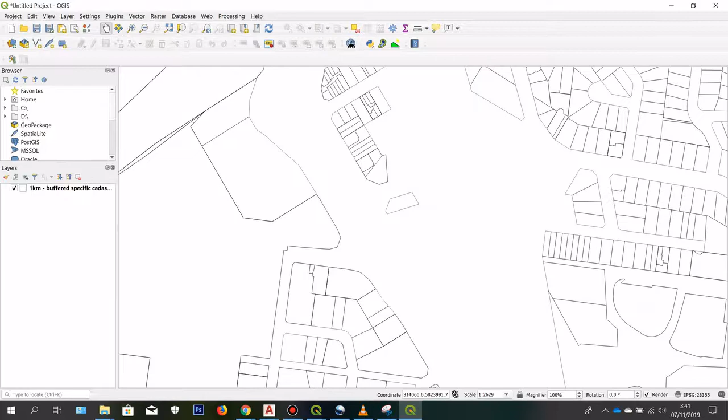I can find the location, the exact same location that the development activities have. I can zoom in and find that this is the same area as the development activities. So I can show you here that this is the same location.

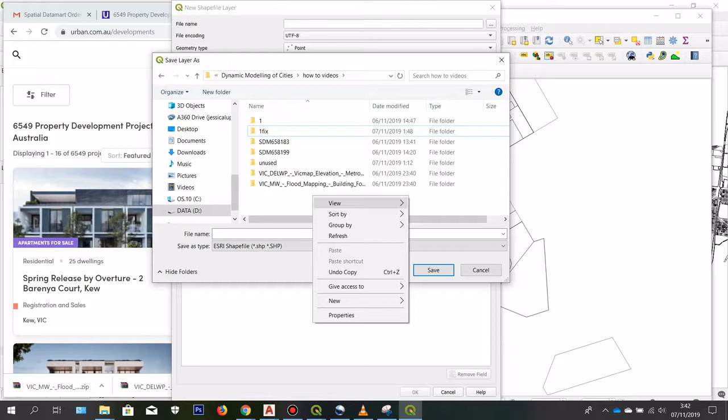So what I'm going to do is map it into here. The first thing I need to do is create a new shapefile, click here and choose whichever folder you want to save your file in. I'm just going to create a new folder and give it a name, development activities. I'll save it, and then choose polygon for the geometry type.

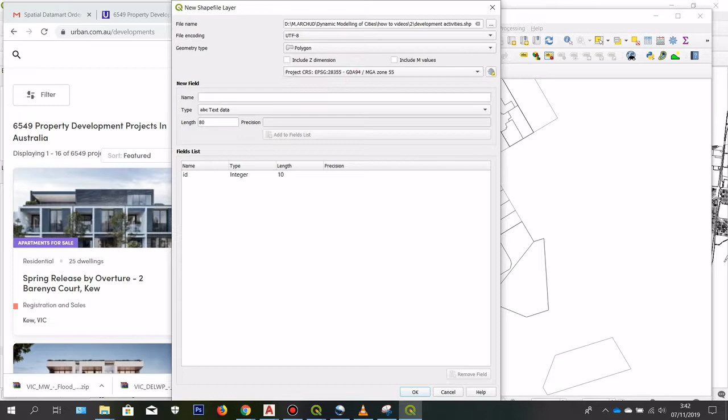There is point, multi-point, line, and polygon. I think it's better for you to choose either line or polygon, but in this case I'm just going to go with polygon, and then choose the projection zone 55, and then okay.

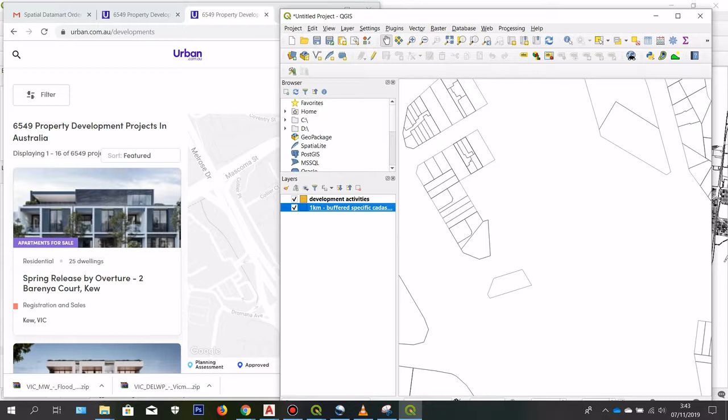So I have a new shapefile layer that will contain all the development activities I'm going to map. The first thing I am going to do is go back to the cadastre layer, click this pen, and then click the select features by area or a single click.

So I can choose this area, and then click Control C, in other words copy that, and go to the new shapefile I have already made, the development activities, click the same toggle editing, and then click Control V.

So it is automatically giving you a color to indicate that this area has development activities going on.

After I get this, I can right click and go to open attribute table, and essentially this table is the identity of this particular block.

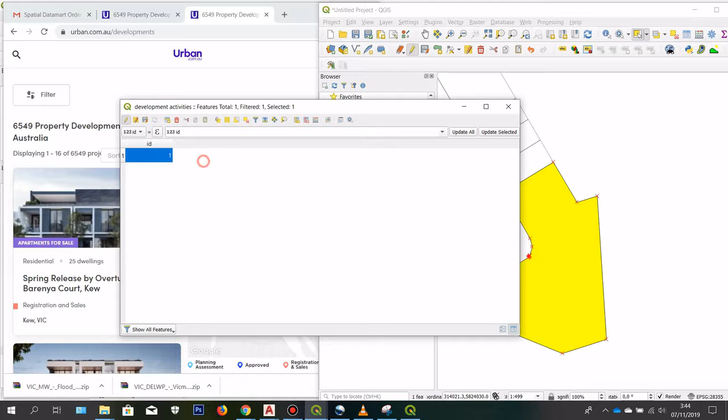So here I'm going to name it 1, and for the identity I want in my block, I want to add the height of the building and also the type of building that is going to be happening here.

I can select new field, and give it the name height, and choose decimal number. This decides what kind of data, a number or text, you can put in the table. For the height, I'm going to choose number and then OK.

I can add another field and give it the name of the building, and change the type to text.

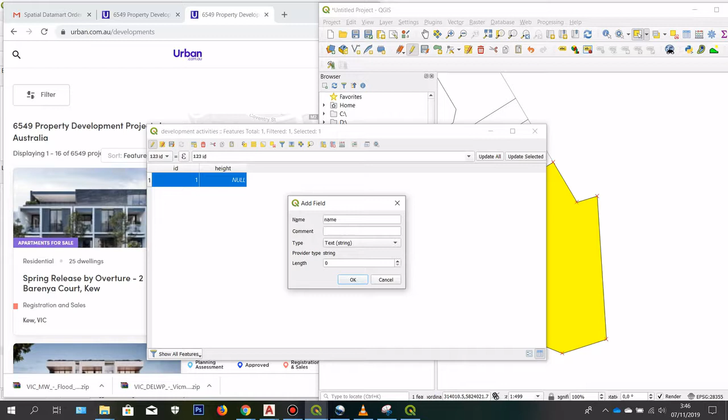So then click OK. So I have my table here, and before I can type in the height and the name of the building, I can click this red symbol, and it's going to tell you the height of the building as well as the type of the building.

So here I can see that it is going to be a townhouse. And as for the height of the building here is... okay, so maybe here they don't have the height.

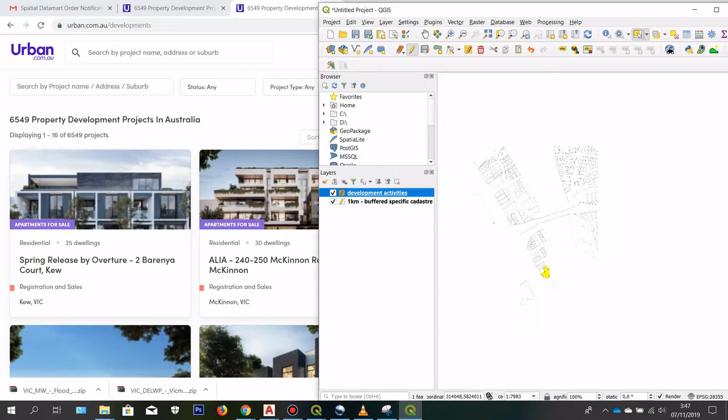So maybe I can just change it. I'm just going to quickly change to the area to the one that they have. So here I can just zoom in to see.

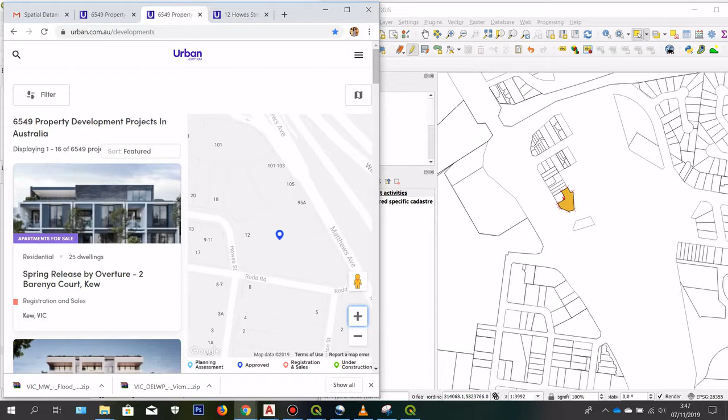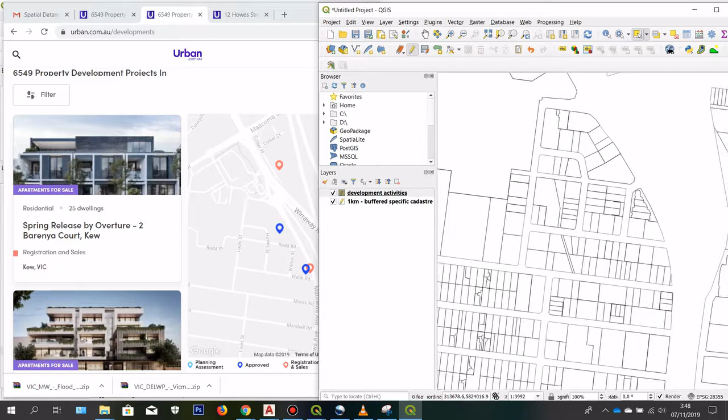So it's here. So I am going to assume that this is here. The development activities that are happening here are going to be in here.

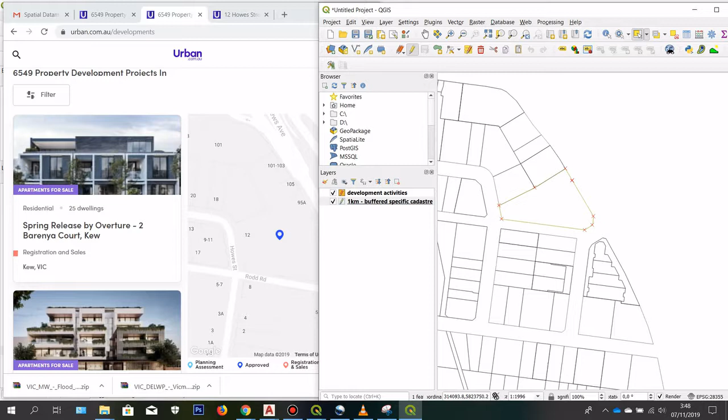So I'm going to do the same thing here. I'm going to select this area, copy it, go to here and paste, and then open the attribute table. It shows here the new one is the one that I haven't assigned an ID to, so I can just put number 2, and the height will be 5.

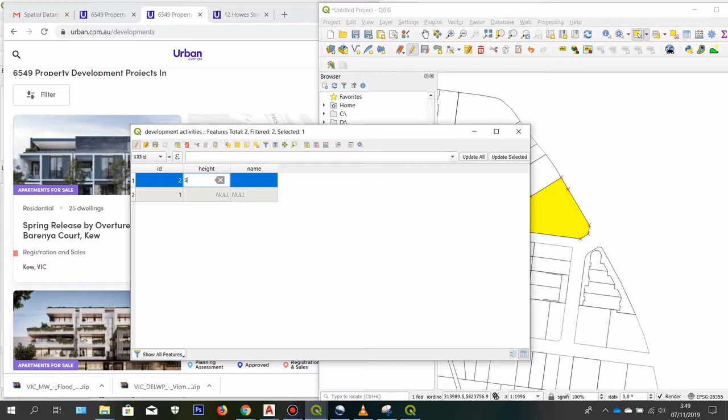It means that it's floor count 5, and then the name will be the building type. So it's going to be residential. So I am going to put residential here.

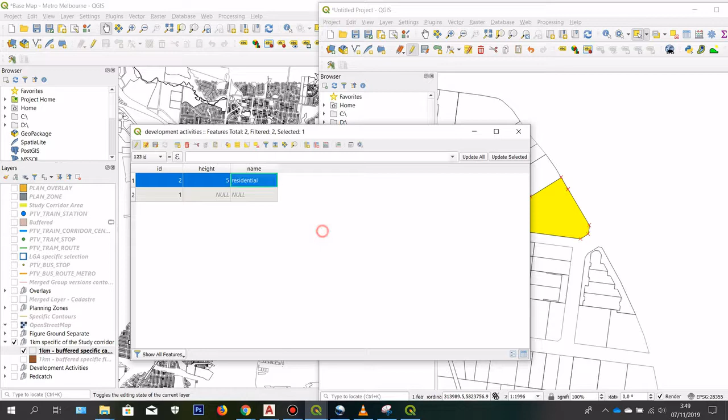And then close it. Here I have the identity of the building. So in order to show what kind of building, or the height of the building, we can go to properties, and then go to the labels here with the symbol ABC.

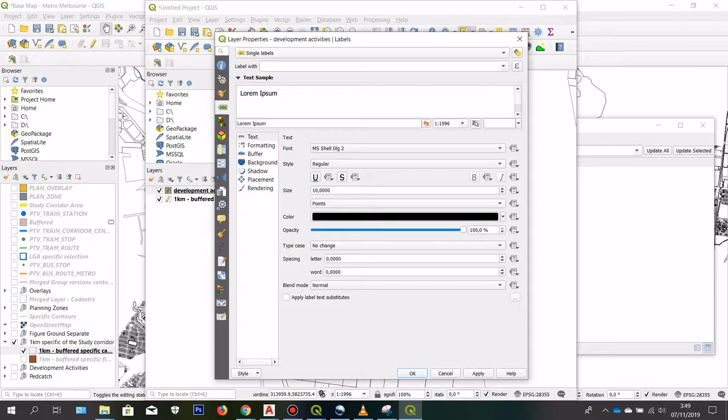Then we can choose single labels, so we can choose either the height or the name of the building that we want to show in this block. I'll go with the height of the building, because usually the height is the one that we need in this kind of mapping.

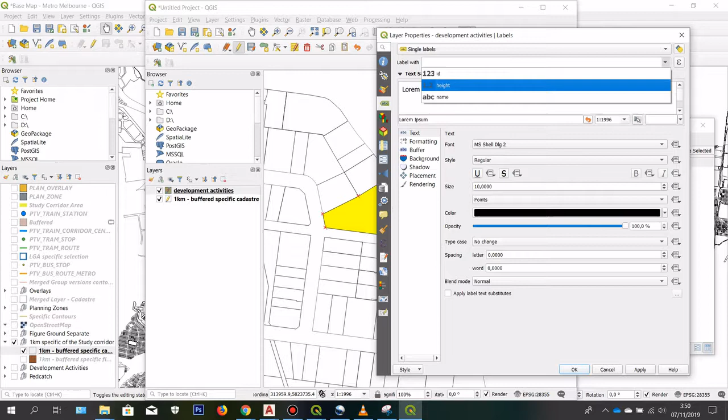So I'm going to choose, here in the label with, you can choose this. This is from the table that you created. You can see the height and the name that I have created, and I'm going to choose height, and then click OK. So here it shows the height of the building.

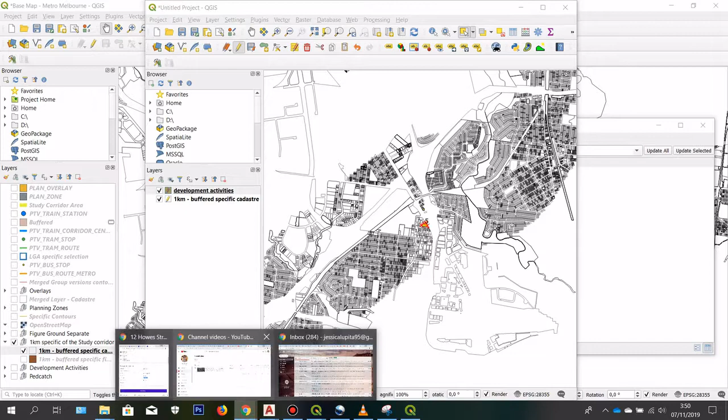If you zoom out, it's going to still show the number. So you can do it to the rest of the maps using this side. You can just put it side by side to make it easier for you to map.

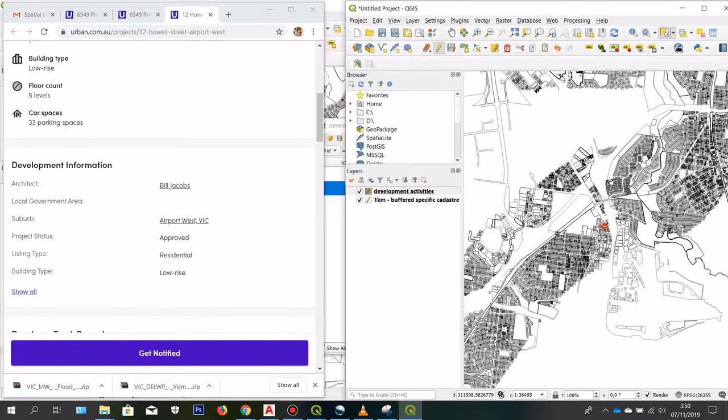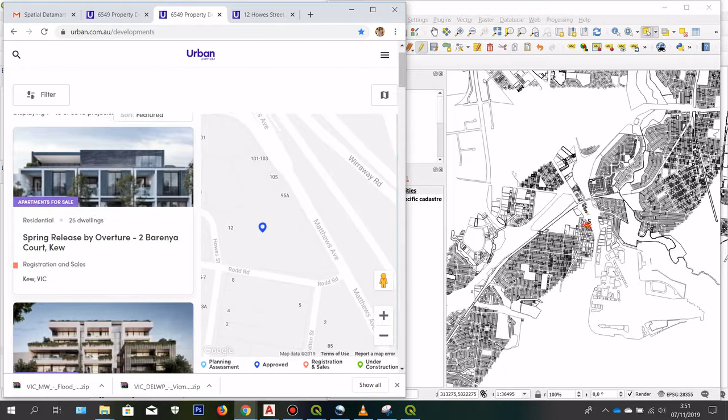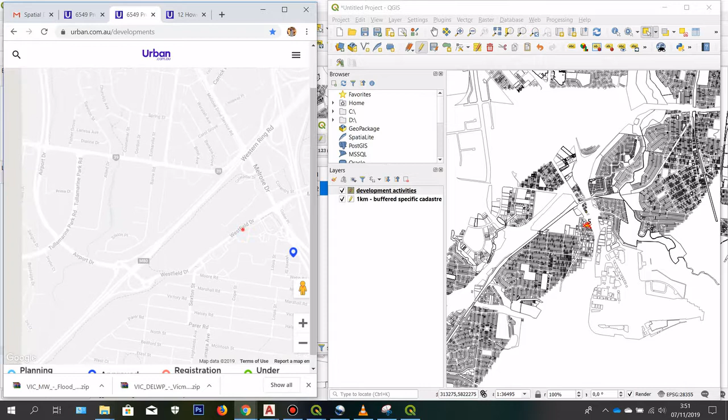So here is how you set it, and then you can go ahead and map the rest of the development activities into your cadastre. So in this method, you can also map the facilities.

You can also map certain buildings that you want. It's not only development activities you can map, but also different kinds of things. You can create a new shapefile, choose the cadastre from the cadastre layer, copy the block, and paste it into your new shapefile. Then you can give identity to that block with the height or name of the kind of buildings or facilities you are mapping.

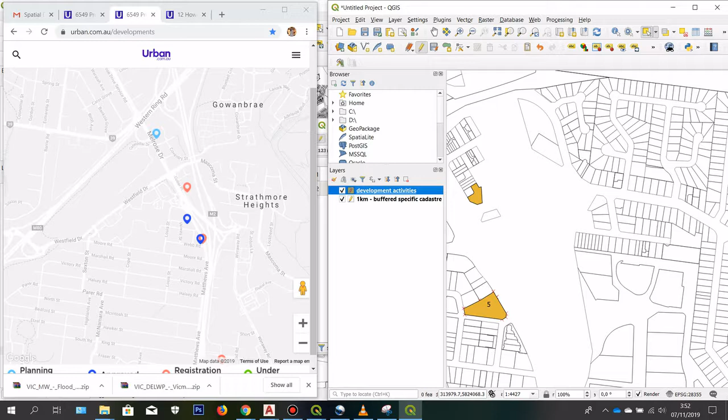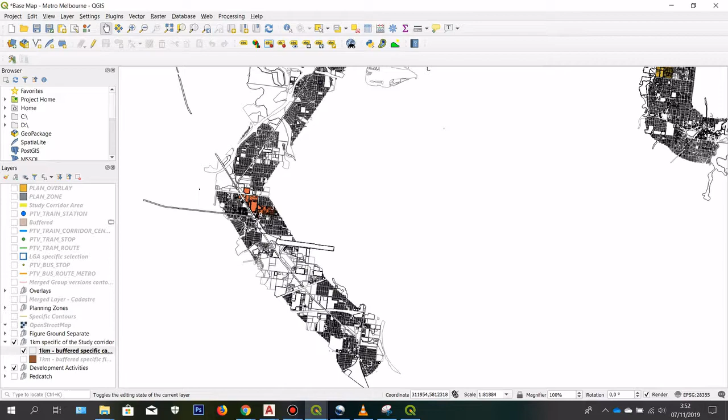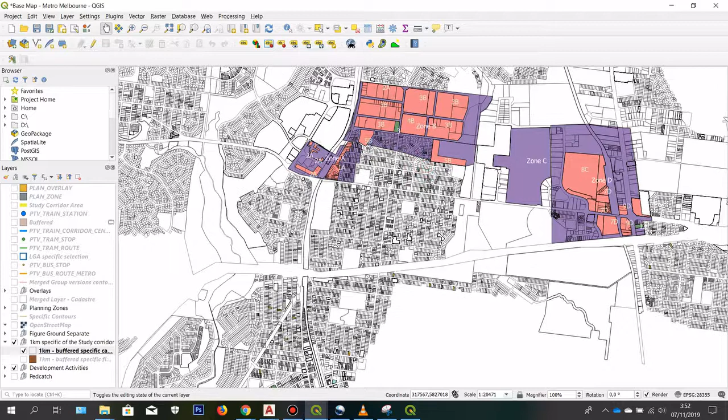So that's it. I'm going to show you the one that I have done. This is the development activities that I have mapped, the whole loop, so this is essentially what it will show you - the buildings that I have mapped, and also the height of the buildings. And yeah, that's it. That is how you can edit a QGIS map.